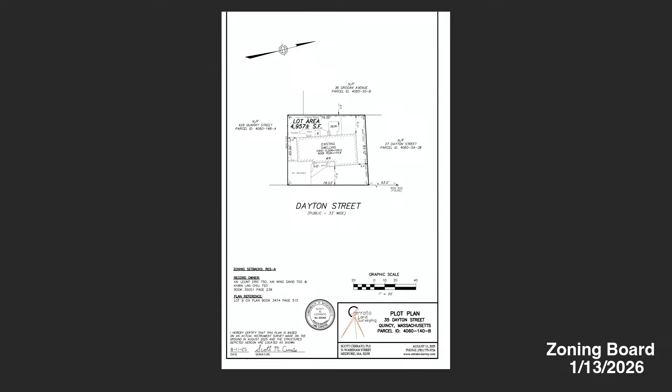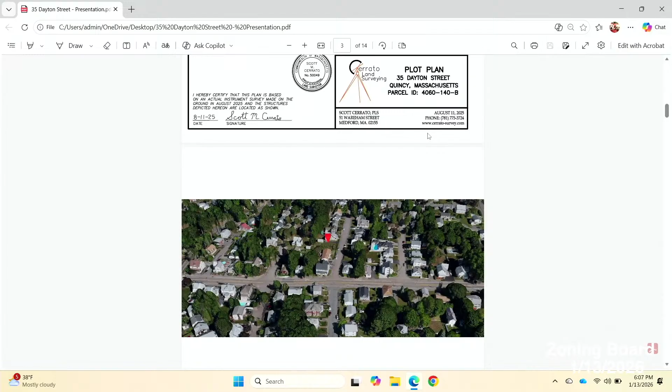So our proposal is to raise on top of that and add an additional story. Here's an aerial view of the surrounding area. If you could speak up so we can get this all, please. Oh yes, turn it up, I don't know. It's right off of Quarry Street.

Currently, as you can see here, it's a 1.5-story home surrounded by a majority of 2.5-story homes in that neighborhood. This is a view from the front. It's a single story with an unfinished attic on top.

So the original house has a finished basement and a 1-story with 1 car garage and 3 bedrooms, 1 bath.

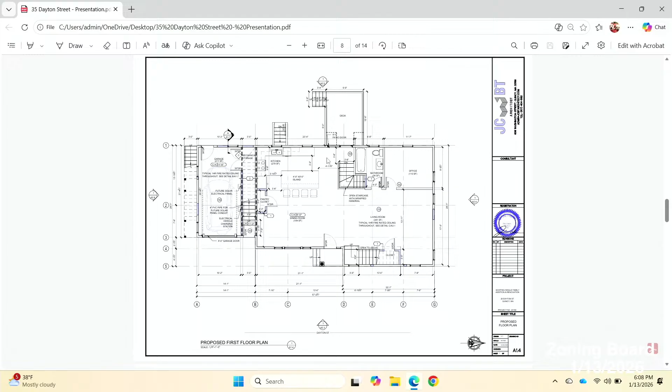We're proposing to keep that single car garage and open up an open concept on the ground floor, keep that one office room in the back and remodel that, remodel the bathroom on the first floor, and add a new kitchen. The rear deck stays the same.

On the second floor there's 2 additional bedrooms. And then on the left side of the dwelling, above the 1 car garage, the owner would like to propose to add an ADU unit, which is about 850 square feet.

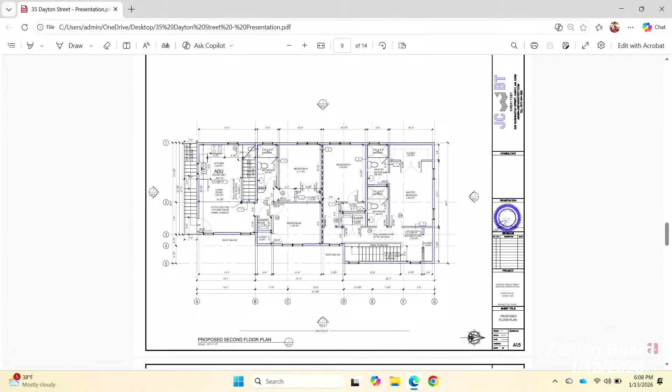This is a view of the original 1-story, and then our proposed. Actually the original height of the building is about 17.6 feet. And then our new proposed height is still less than 35 feet, at 29 feet 1 inch at the average.

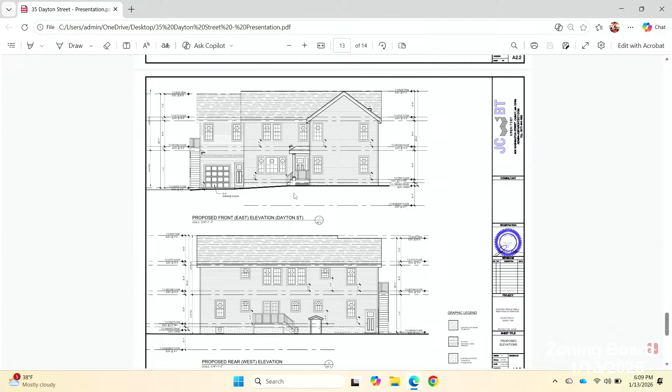So all these setbacks will remain the same. That 1 car garage will stay. And that will be about it.

So the reason you're here is you had a variance on this property before, which subdivided the lot. If they didn't do that, they could have put an ADU or another house there, which they decided to do then, put another house and subdivide that lot. What I see here is a set of plans that want to turn a 1-family residence into a 2-family. So I'm not with you, Mr. Chin. I think they had their chance when they owned the property to do what they did, and I won't be voting for it no matter what kind of sugar you put on it, so I'm out.

Mr. Chin, any questions? Just want to confirm the building height, did you say 29 or 34? 29 feet 1 inch. Your dimensional form says... I thought you said 34. 39. No, 29-1, it's 34 on the other one. Is that the right one? That's the wrong place, I got the wrong place. Yeah, it is at 29 feet. Sorry, I was looking at your other petition. Yeah, I see it. Okay, I have no other questions at this time.

Mr. Hamel, I have no questions. Ms. Barry?

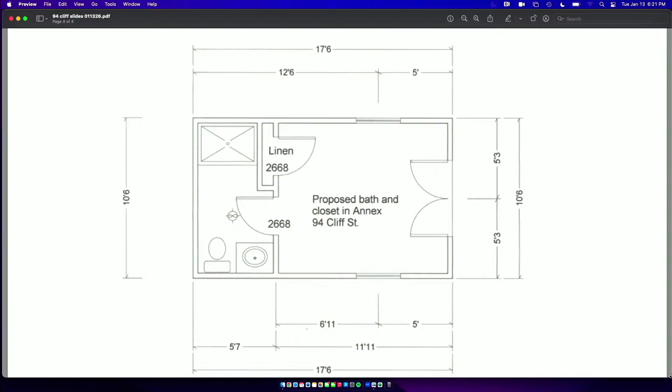Right, just sticking with prior judgments, to be consistent across the city, I have to unfortunately oppose. We've had a lot of requests like this—people wanting an outdoor office, and you feel for them, but it's not your right, it's the city's issue. If you sell it or somebody else comes in, and we've been consistent in unfortunately denying them. The city council, I believe, is working on permitting stuff like this now, but as of right now, they don't.

I understand. Would you like to withdraw, or do you want to vote on the petition? Is there anything that can be changed to increase your appeal in the future? Maybe if the city changes zoning and allows that. Okay.

I know we catch people that do garages and put illegal bathrooms in it. Then, all of a sudden, 5 years later, we go back and check, and we see it's been checked a couple of times and you can't get in. Then you go back there, all of a sudden the garage is finished, there's people living in it. So it becomes a horror show and then you get caught. You gotta spend all that time in revenue just to get it back out of there.

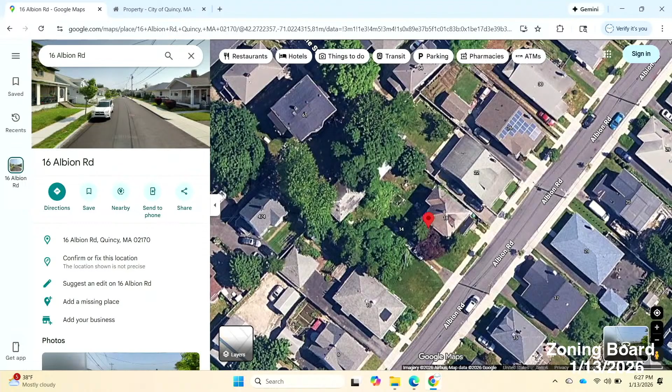Isn't that parking for the other house, where that goes in? Is that where the tracks go in that street, correct? So currently, where do they park, that house? Right now, there are 2 detached garages in the rear for the 3-family. There's a wood fence right here, that's why some cars just park in front. There's no fence - no, there's a fence right here, a wood fence that we see, but the garage is behind that. I don't know when that photo was taken, but everything's been mowed.

It doesn't really look very nice at all, with dirt and cups and stuff all over the property that hasn't been taken care of. But the back, the thing's falling down, correct? The garage you have, is it brick or block? The left one has block. The one behind is block, the one being ripped down. The one on the right is all wood and it's dilapidated, ready to fall in anyway. Is that one going too? Yes, that's being ripped down too. During this project, will that be ripped down? Yes. That's all I wanted to know - whether someone's gonna rebuild back there or get hurt.

Not hurt or killed, 'cause that's a mess, really is a mess, and probably someone hasn't cleaned it up.

My thing is, the road that's there, are you using this so both of you can go in the back? Is there gonna be a shared driveway? No shared driveway, they both have individual driveways. Well, he doesn't have a driveway, there's just tracks in the middle of that property.

So right there now, will be a separate driveway, so this new driveway will go in, double wide. There's no fence or anything down there that I see. So you're just gonna go and plow it? One thing, so you're really sharing the driveway, really. You can say that, yes. Okay, that's what it'll be, double width, yeah.

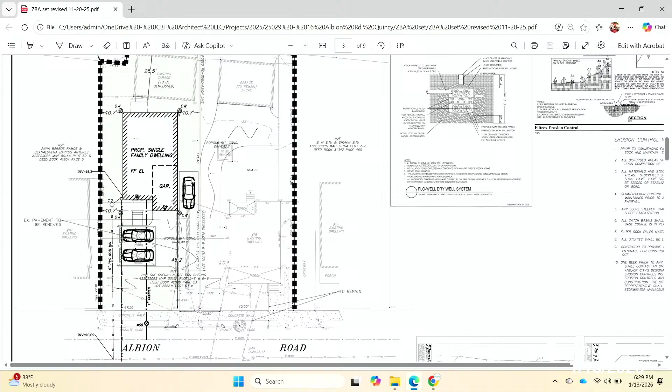But the proposed driveway will only go that far for an extra parking space on the side. Why wouldn't it go all the way to the back? Why does it have to go back that far, my question? Why do you gotta pave all the way back there? Why can't you bring the car up by the house in front of this house? Because they got two cars that can park there, backing up. We don't need that parking space, we only need my three. Not a problem, so it's just the extra one.

They can end it right there. Right, and when you're subdividing the property, are you gonna write this up as a shared driveway, or will it be separate? So do we want a fence down the middle? Well, we might not know the guy that lives next door in 4 years, or 2 years, or 6 months. We can propose a fence up to a point, so it's wide enough.

I think they just... separate driveway, the land where it's located right now, I don't believe there's enough room. That's where the 20 feet is. I don't think so. Is it 20 feet overall wide for the 2 driveways, so 10 each? I mean, it's wide enough for a single family, and then how far are you...

I can't read this because the zoom print's missing here. On the new house, if you're looking at the house, what do you got to that driveway? Let me see. So you can see, sort of, it's 2, but they're not 10 feet completely, driveway right here. So he's gonna end up with 2, 10 feet.

What's that other house doing over there? What are you gonna do with that? Are they existing, gonna park tandem? The existing, no, they have an existing garage there, that's going down, you said. You're ripping that down, but they will still park there. That's all I wanna know. Yeah, where they're gonna park. They will still... I don't know if they're parking there.

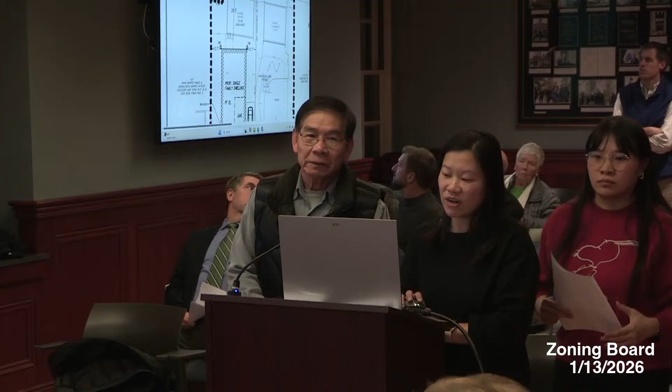The other parking right here, while you're parking. Will you be willing to turn that existing garage into green space? I don't want the parking spaces in front of the house. I think that looks terrible. No, the house should be further forward, and turn that into green space in the back. He's willing to turn that into green space, that existing garage, and the parking space will be at the existing driveway.

I'm looking at this, you see how this house is set back, so your parking's in front? So why is it going down this road? Why isn't that house up with this one, and then you're parking behind, like the other one? Both of you just go up and turn in and park.

We can too. We feel the pavement will be less. So, to put the driveway in the back, there will be more pavement and less green space. But you'll have somewhat of a front yard. The driveway will be manageable since we have a one-car garage, so you come off 9 or 10 feet.

Whatever, just- I can't read this because either someone wrote out of ink or they're just too cheap to print it the right way, which really aggravates me. Look at it, you can't read here, I can't read anything. You got this gigantic piece of paper, and I got these little things in there. I'm not 15 years old, I can't read that, it's getting stupid.

Keep telling people, come on, enough. You got all these symbols, but you don't give me dimensions on the driveway or anything. That house should come up, and both should park in the back and look the same on the street, so you don't have cars in the front of your house. If you're gonna have them in the back, keep them all in the back. Make it look the same, correct? Yes.

I'm with you. I'd rather see the garage moved a little more, move the garage as well, and the house up front, with the garage and parking brought back. Are we still able to do that? We can do that. You're gonna have some front yard, garage paving just to get into the garage, unless there's a garage door facing the street. We will have a lot of pavement in the back for the 3-car garage, 3-car parking, whatever you gotta do.

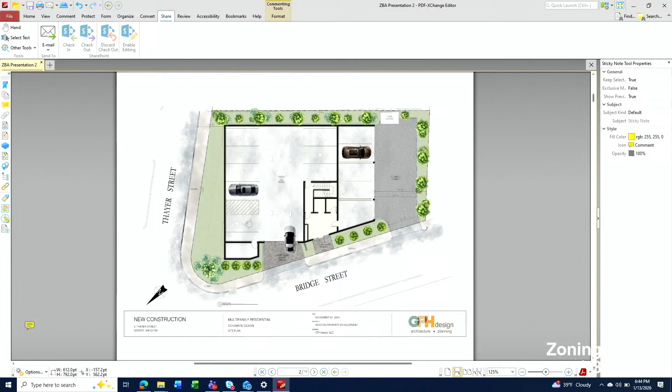Down more. Regarding the building itself, there are 8 total units - 4 of the units are 2-bedroom units, and the other 4 are 2-bedroom plus a den. Obviously, we're trying to appeal to the commuter.

Let's scroll down. As Ed said, each of the units has a washer and dryer, and each has 2 bathrooms, an open kitchen and living area. I'll get to the roof in a second, but right now we're planning on using electric fan coil units, so the rooftop units will be minimal.

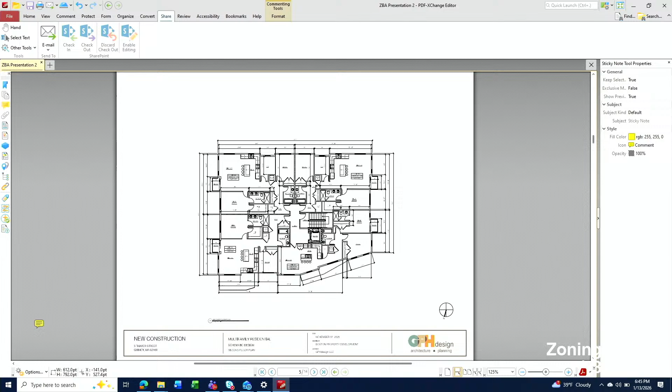My experience is if you locate them properly in the middle of the building, you don't see them from the street, which would be the plan. In which case, if it did, we would screen them out. Just everyone in the other buildings would look down on it. Correct, can't screen that. The units will be small.

I'm gonna get to the rendering of the building, we'll talk about that. So the materials we're planning on using in this building: we're gonna have an EPDM flat roof system with insulation. The siding will be cementitious clapboard siding. We're also gonna introduce in the window bays some cementitious panel systems. We're trying to appeal to the local vernacular while also giving the building a modern look. As you're all aware, you see a lot of this type of fabric in Quincy.

The windows themselves, we're planning on using vented windows, but not full open windows, so you'll be able to get fresh air into the unit, but you're not gonna be able to open it up all the way. That'll meet all code requirements. We talked about the equipment on the roof. The only thing that should be up there are the condensers, one for each unit.

With that, I'd like to address any questions you might have regarding the design.

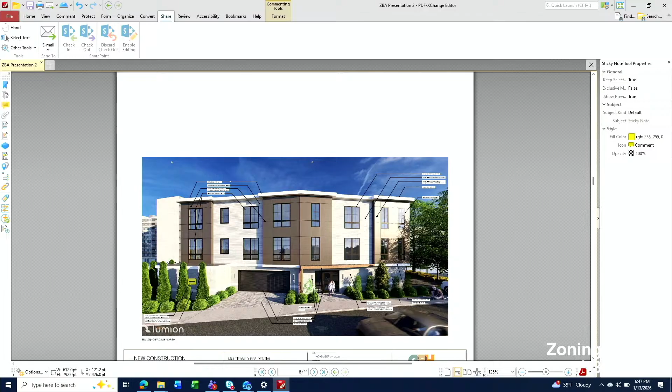No, it's a good looking building and it's kind of ratty down there now. I like the idea of something new going in there, at least. That's not a good place you have over there right now.

And as part of the development team, we also hired Karen Goslin, who's a landscape architect, and she provided a plan to the planning board. There's a significant amount of landscaping being provided around the building, as you can kind of see in these renderings.

So, Chief, and for the record, my name is Chi Man from Hardiman Design Group, address is 1285 Washington Street in Weymouth. You gotta speak up a little, it's hard to hear tonight. There you go. And that's some of the renderings of the building.

Yes, so let's go down to the site plan, just zoom it down a little bit. So again, here's the irregular shaped building parcel, fronting both Bridge Street and Thayer Street. The building entrance is going to be fronting Bridge Street here, with two driveway curb cuts. The curb cut at the top here is the existing curb cut we are going to reutilize, and we are going to be proposing a second curb cut, which is going to go into the garage parking inside the building. The driveway here is going to be bituminous, it's open air, and then the parking is under the building.

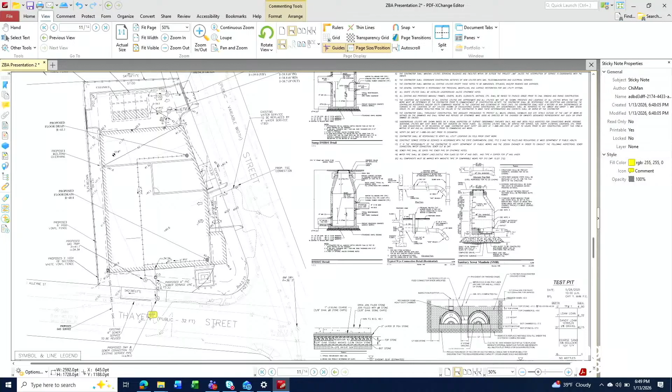For utilities, we are going to utilize all the city-provided utilities. New sewer connections are going to be tied onto Thayer Street, and we are going to tap a new water main for the fire protection and domestic water services into the mechanical room right here. At this point we are not 100% sure we need the transformer. We have to talk to National Grid because this is only an 8-unit building, and from my experience on other 8-unit buildings we might have a pole mount transformer. But in the case that we need a transformer, it's going to be located at the corner here, and it's going to be all screened by landscaping.

And on the sidewalk, the city actually built all the sidewalk along the frontage of the site, so any sidewalk disturbed by utility installation and the new curb cut is going to be new sidewalk matching the city standard. The driveway curb cut for the ground floor parking, garage parking, is going to be a paver system for better appearance and better aesthetic to the building.

For the stormwater, the current site doesn't have any stormwater management system. Everything from the roof down to the ground is basically sheet flow out to the street and down to the catch basin downstream from us. So our new building, the whole entire roof is going to be a flat roof. We are going to be catching all the roof water and routing it into the driveway. It's going to be a Cultec system installed underground, and that is going to reduce runoff on all 2, 10, 25, and 100-year storms as compared to the existing conditions.

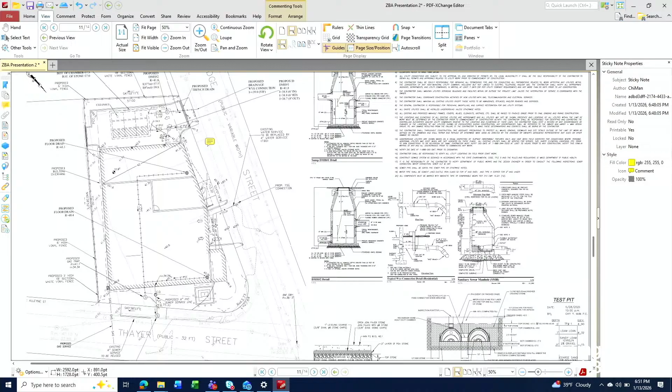The stormwater quality is also going to be enhanced by this CULTEC system, which has something called isolation rows that can remove total suspended solids. We have trench drains here to intercept all the runoff from the open pavement area. These all route into the underground CULTEC system, and we have an overflow pipe that connects to the city drainage system. So water quality is going to be improved, and the amount of water we discharge into the city system is going to be reduced.

One last thing we'll talk about is the dumpster area. It's going to be all screened off. It's a roll-off dumpster, so trash pickup will come from Bridge Street. We can roll this out, and it will be a private trash pickup for the facility. Open up for any questions?

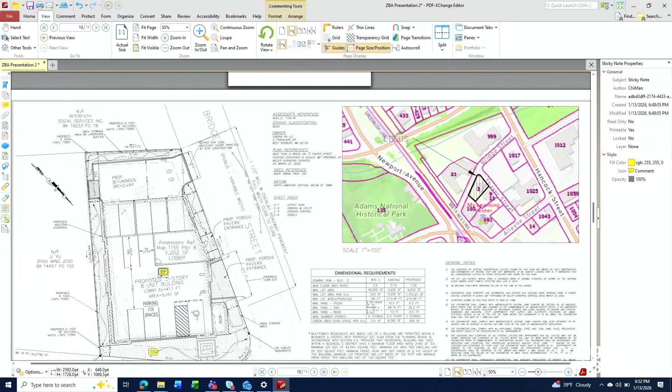How big is that CULTEC system you have? This system has 9 units. It's 3 rows by 3, so 9 units total.

What's the flow rate out of that? The flow rate, if you give me a minute, I can tell you that, and the exact volume.

I can't read these little teeny prints, so I've got to ask. Do you have one? I think my kid could read that. Oh, magnifying glasses, that's why I have them. Two of them, you need two of them, and then the paper starts burning. Stop those—we're going to have to start requesting a full-size set of plans. I did that, I don't know, twice in my term.

So the total volume of the CULTEC system is 935 cubic feet. It's a fairly large system. And also the paver system we are going to be providing is a porous pavement, which has a volume of about 80 cubic feet.

I just wanted to know what the flow was. Ken, any questions? I do not have any questions. Mr. Himmel? No questions. Ms. Barry?